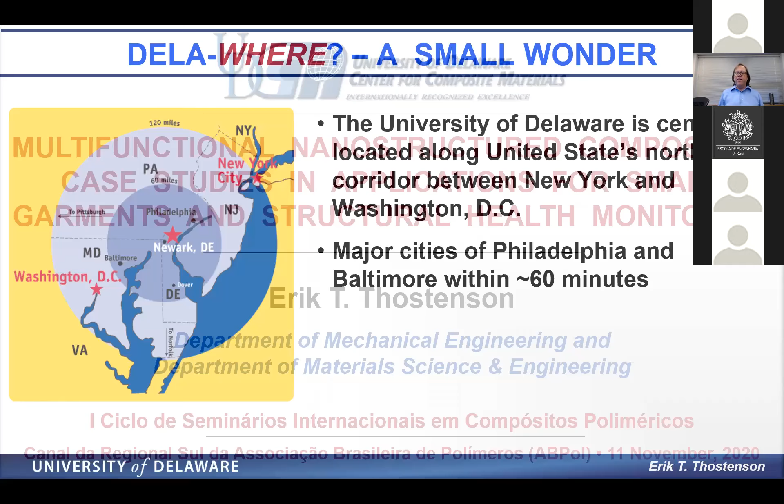But Delaware, very recently, is the home to the President-elect of the United States. He's a University of Delaware graduate and also a colleague. He has a faculty appointment at the university as part of the Biden Institute for Public Policy.

As Sandro mentioned, I'm affiliated with the Center for Composite Materials. It's the oldest research center here on campus and has really been an interdisciplinary center of excellence in composites education and research, spanning everything from fundamental research to transitioning technology to industry.

Also, mark the date - hopefully everyone will be able to travel by 2023. I am co-chair of the ICCM 24 conference, and that is being held in Baltimore, just about an hour down the road here from Newark.

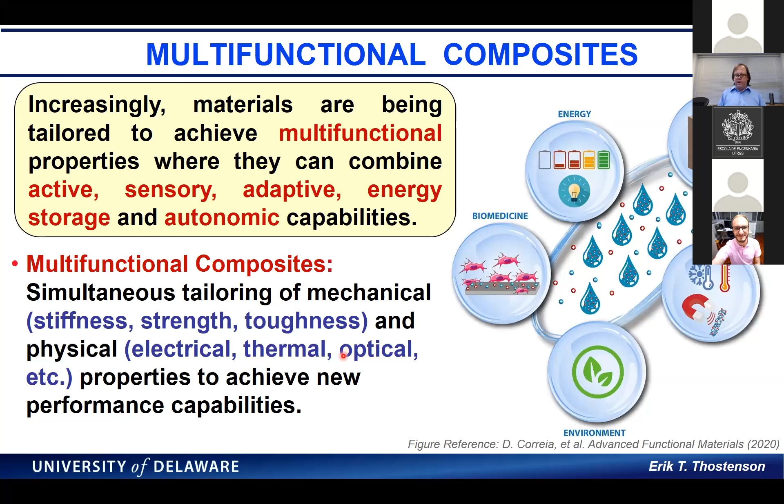So this multifunctionality, in addition to when we talk about traditional fiber composites where we're usually talking about strength and stiffness, now we can tailor this to integrate more functionality at the material level. These are just some examples of multifunctionality.

This is from the AFOSR Mechanics of Multifunctional Materials and Microsystems website, which I've adapted a little bit, but I've highlighted a couple of the key words that I think are really both current and emerging areas of integrating multifunctionality in materials - specifically sensing, autonomic and reconfigurable systems, self-healing, self-cooling, energy management and generation, as well as actuation.

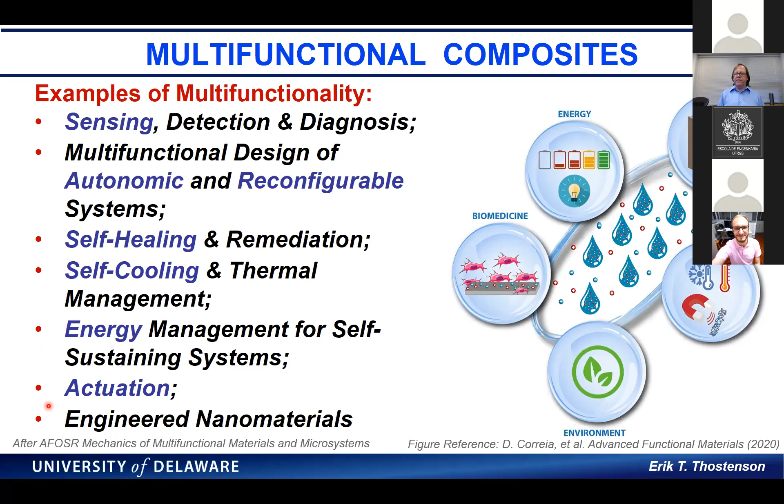I think a lot of people, many here, will likely be familiar with nanostructured carbon - the two most common things we talk about are carbon nanotubes and graphene. They have remarkable physical and mechanical properties, and also very high aspect ratio, whether it's length per diameter or the length per thickness of the graphene sheet. This has really stimulated, from a composites point of view, a lot of interest in the development of these composites.

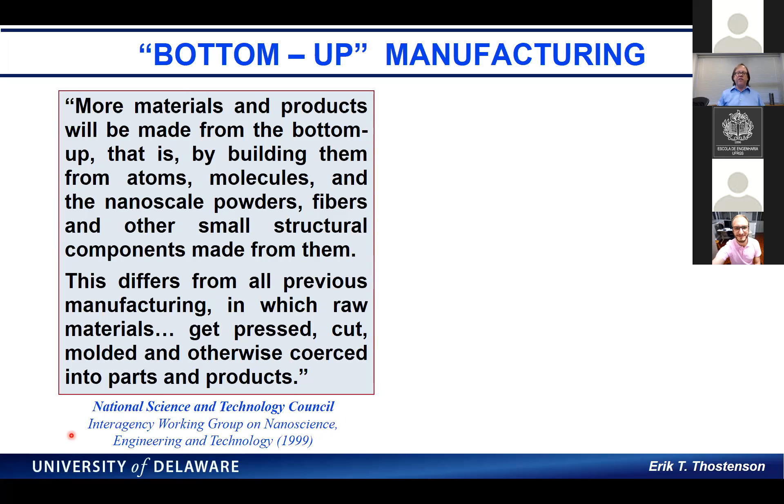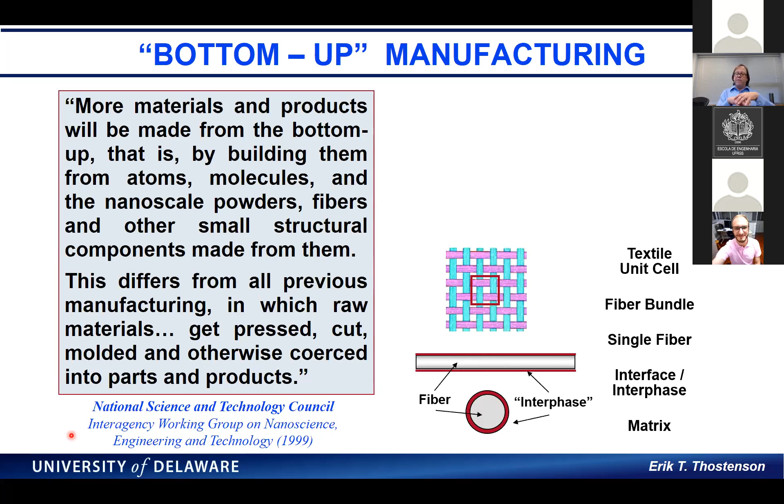But from my point of view, this wasn't something new. As a composite materials engineer by training, I knew that you select the materials, you tailor the interface, which is certainly at the nanoscale. You bend and twist the fibers together, you laminate them, all the way up to the final net shape composite. So really, composites are bottom-up manufacturing, and the integration of nanotubes is just one scale a little bit further down - nanotubes or other types of nanoparticles or nanosheets.

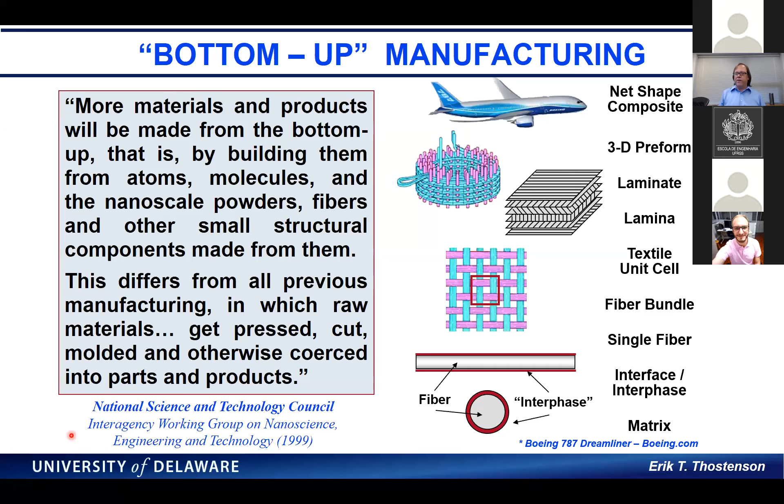I think the reason for this is you can think of all these discontinuous nanomaterials as tiny little wires. When you strain them, the tunneling gap changes between those individual wires. And then at some point I thought, well, obviously when you start getting cracks in the material, you start severing some of those permanent connections.

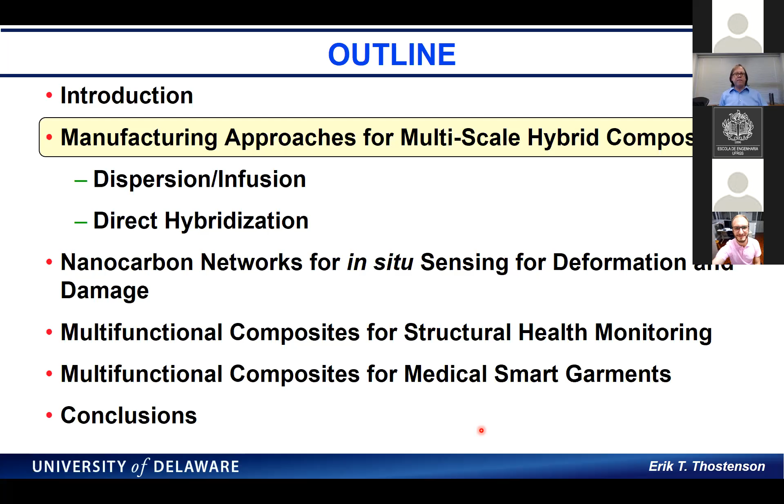These are just some different approaches. I mentioned this dispersion into the resin. People have spent a lot of effort over the years looking at this, as well as myself, modifying the chemical functionality, looking at different ways to disperse it, such as a calendaring approach, and then manufacturing the final composite using something like RTM, VARTM, or maybe resin film infusion.

The other approach is direct hybridization with fibers, basically integrating the nanomaterials together with the fibers, followed by infusion. There are a couple different ways we've done this in my group, and other ways other people have developed, but I think the three most common are chemical vapor deposition, dip coating and sizing, and something we've spent a lot of time on in my group over the past several years, electrophoretic deposition.

In this dispersion and infusion approach, we disperse the nanotubes using some sort of shear mixing. In our work, we use a calendaring approach, and then infuse the dispersion into the fiber. This was many years ago, using vacuum-assisted RTM, or VARTM as many people call it. You can see the dark area is that dispersion of nanotubes in the epoxy resin. One thing we could see is once we manufactured the composites, we still had electrical percolation in the as-processed nanotube fiber composites, and because we had a very good dispersion, we didn't see any filtration.

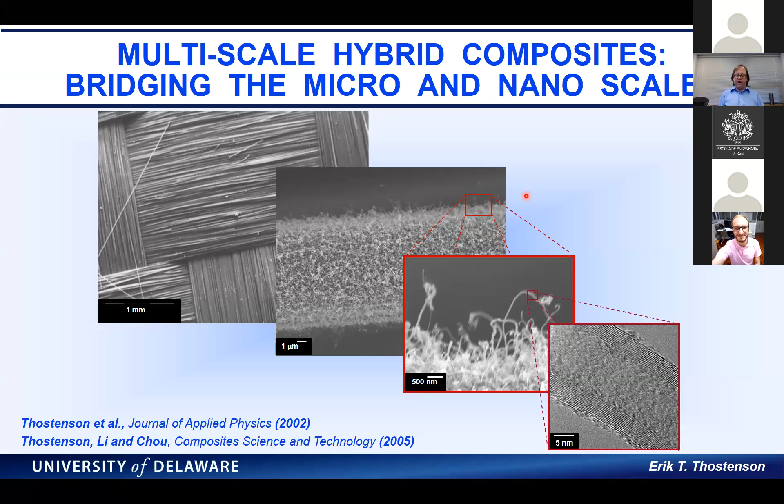The other approach is direct hybridization, and the first one I talked about was CVD, which is something I spent a lot of time doing in my PhD work. That's what you see, the nanotubes grown on the surface of the carbon fiber. Basically what we do is apply the catalyst, heat treat the fibers, and then put them in a CVD reactor, and grow them under some sort of hydrocarbon gas. In this case, we used acetylene.

The catalyst is applied directly to the surface, and it takes about half an hour to grow. This is a high temperature process, so it can be damaging to the carbon fibers, and it's also not applicable to a lot of other types of fibers such as aramid or glass fibers, which may soften, or you're certainly going to burn off the sizing, which is a chemical coating on the surface of the fiber.

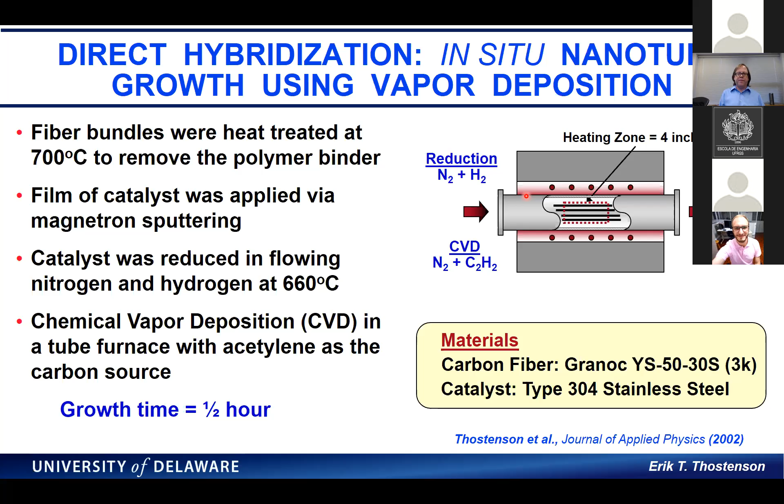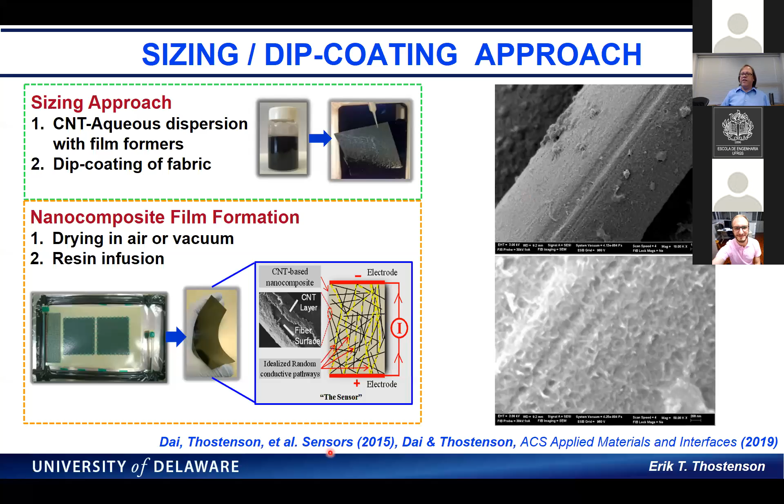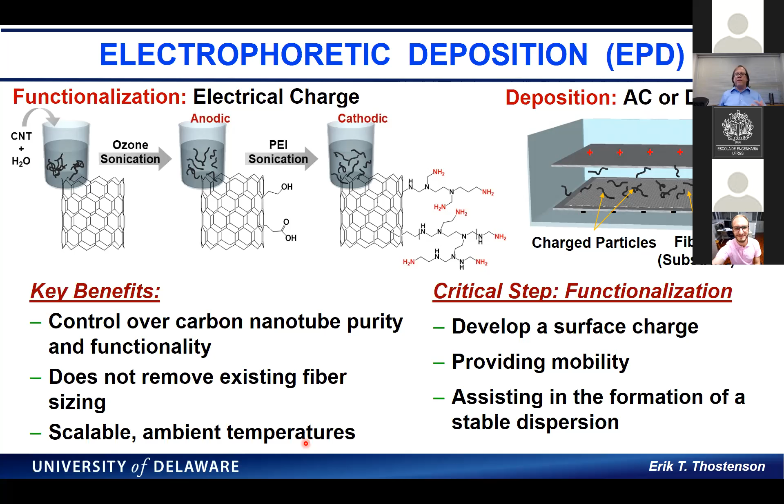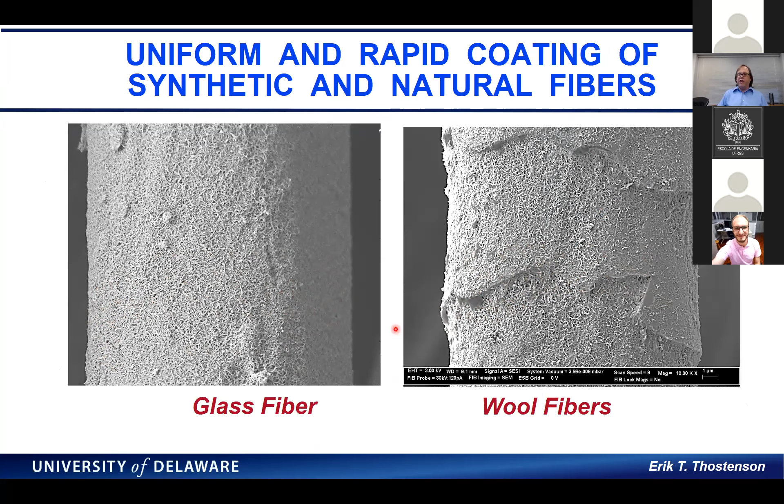These are some examples of where we've deposited on different fibers, and it doesn't just deposit on the fiber, but it completely surrounds each fiber in the bundle. This is glass fiber, where you see a very uniform coating. We can also deposit on organic materials such as wool, or aramid fibers, which would certainly disintegrate in a high temperature reactor. We also have a lot of control over the thickness - these are a couple of cross-sectional micrographs where we've deposited at varying thicknesses.

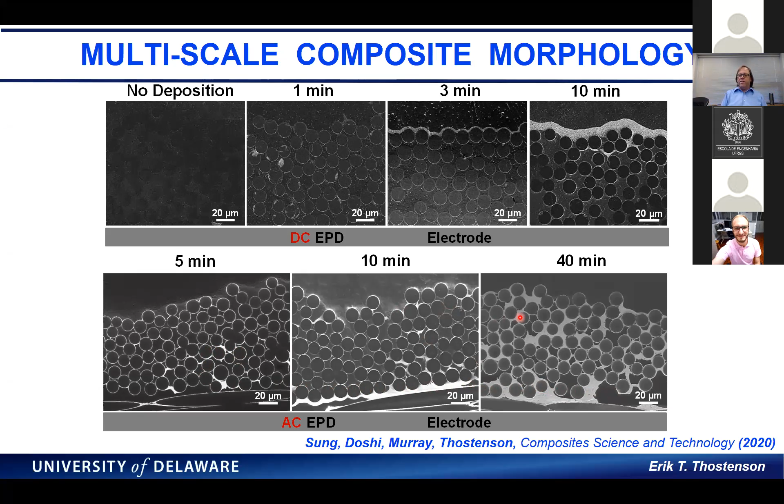So I think it's really not just raining down onto the fibers themselves, but actually this film grows over the fibers and around each fiber and is remarkably uniform. So that's really this enabling technology.

And in these next ones, we use all the different techniques because they all can create conducting pathways. Sometimes different processes are better than others.

But I just want to briefly mention and talk about the nanocarbon networks for in situ sensing of deformation and damage. This is really where we got into many years ago. It was really just me in the lab playing around, saying, well, what if we make a fiber composite with these? Maybe we can use it to sense microcracks.

In my composites class, this is a classical mechanics problem: you generate transverse microcracks in cross-ply laminates, and as you continue to strain at higher and higher levels, you start getting a saturation of cracks due to shear lag. Of course, this matrix cracking doesn't necessarily change the Young's modulus that much, but it's certainly detrimental to durability.

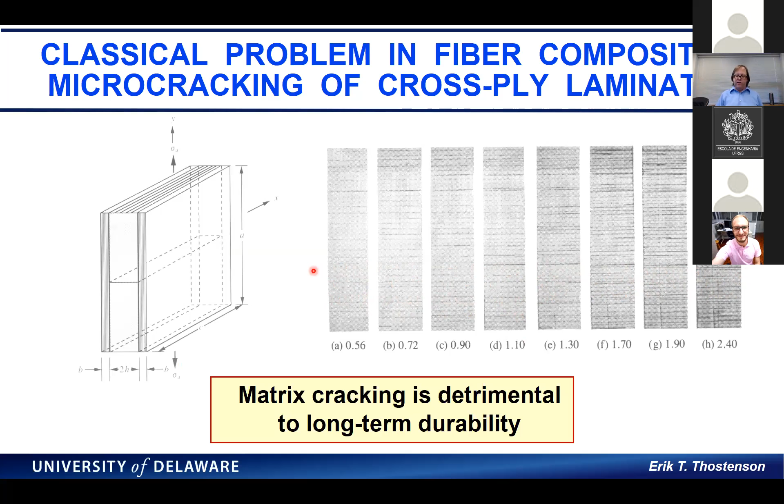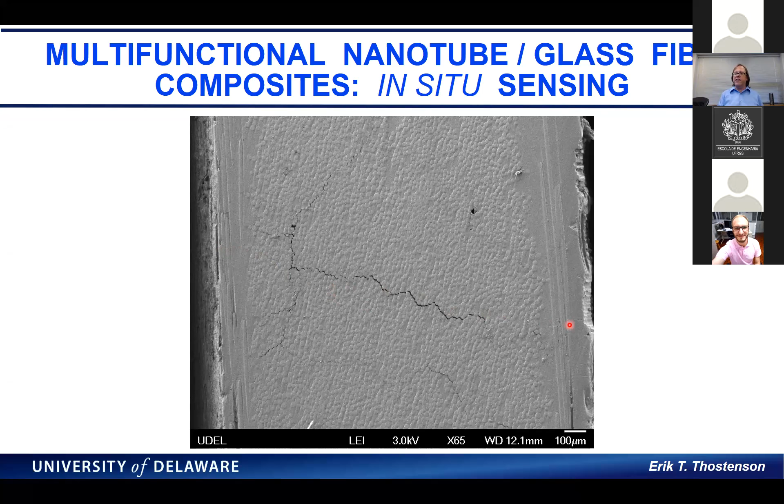If we zoom in a little bit, you can see the individual fibers, and you can see it's debonded at the interface and cracked between the individual fibers. Now if we look in between the two fibers, right at that edge, we can see the nanoparticles, in this case the nanotubes, sticking out. So we're creating those conducting pathways, and the cracks are breaking them.

So this was pretty exciting that we could see this, but could we use this to detect damage? We did these very initial experiments where we looked at delamination, where we cut a center ply, and we could very clearly see the initiation and extension of delamination when loading this specimen in tension.

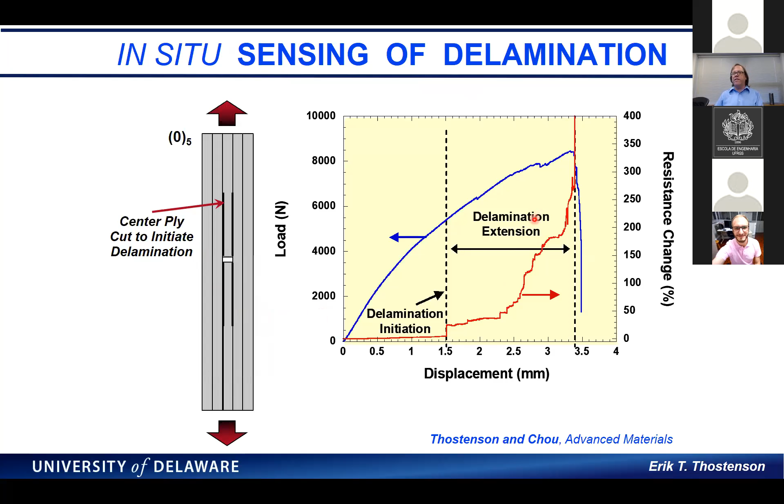And then we made a cross-ply laminate, and this was also very clear. At some point you saw these jumps, and this was really that damage accumulation where you start getting transverse cracks, and then those transverse cracks start accumulating in the 90-degree ply, and then eventually lead to either interfacial delamination or fiber fracture, and then specimen fracture.

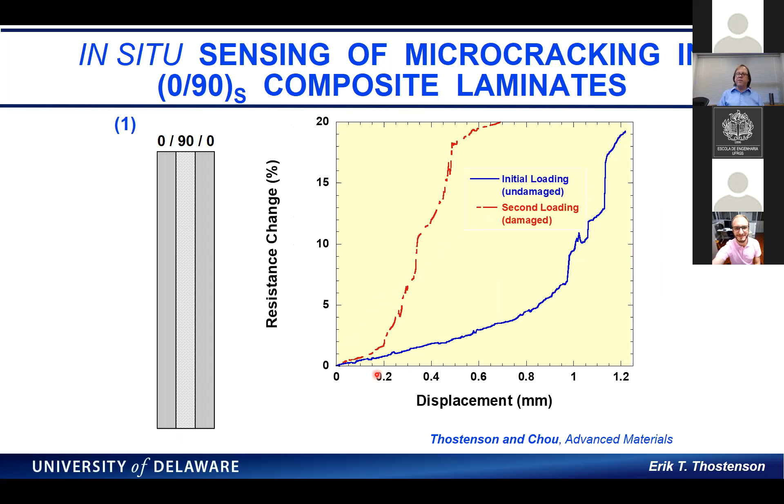So this was encouraging. We did some more work where we loaded it in tension and those cracks would open. As we unloaded it - that's the blue curve, the initial loading - those cracks would close on themselves. But when we reloaded it, those cracks would reopen, at a much, much lower displacement.

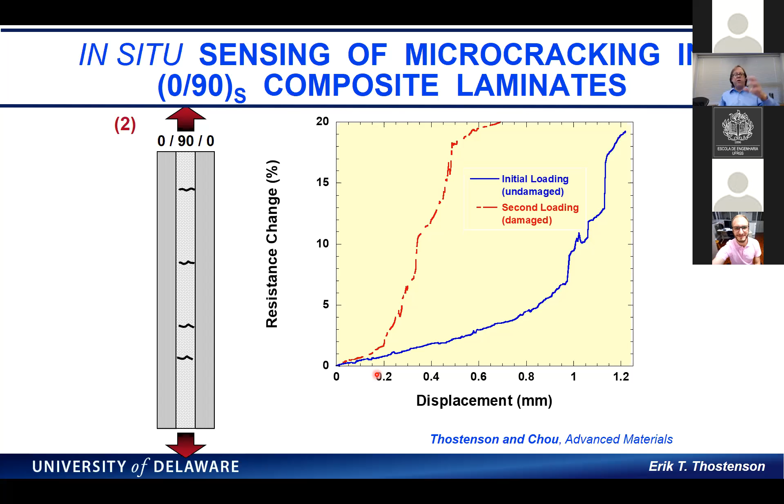So the specimen was actually telling us, due to the piezo-resistive behavior and the opening and closing of cracks, something about the state of damage.

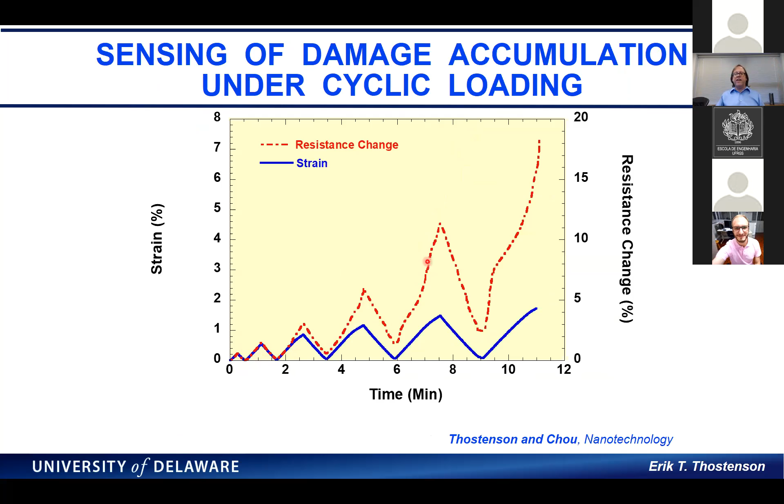This shows the same thing. Here we did progressive increasing cyclic loading, and at very low strain you really don't see much - it's like a strain gauge - but at higher strains you start seeing that deviation, and it becomes quite nonlinear. So we see the crack reopening, then we see that elastic loading, and then we go higher and see new damage.

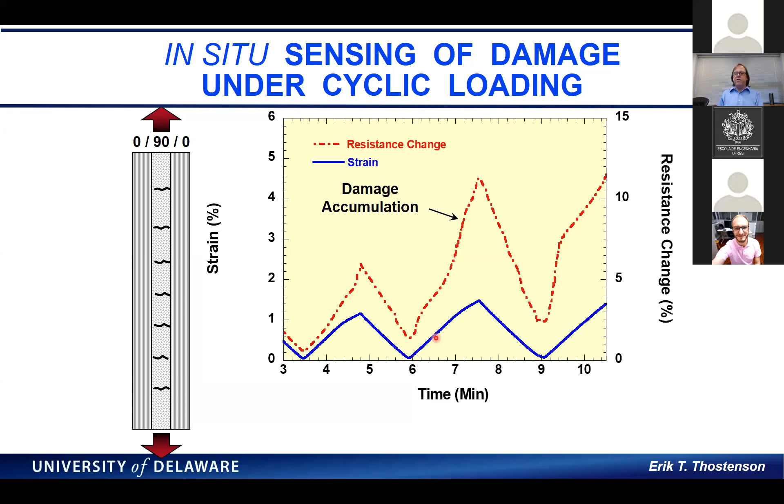This was exciting because we thought now we can use this to detect a lot of other types of damage, and do that in situ. This is that same data plotted in a different way, showing you the damage accumulation, the crack closure, and the crack reopening.

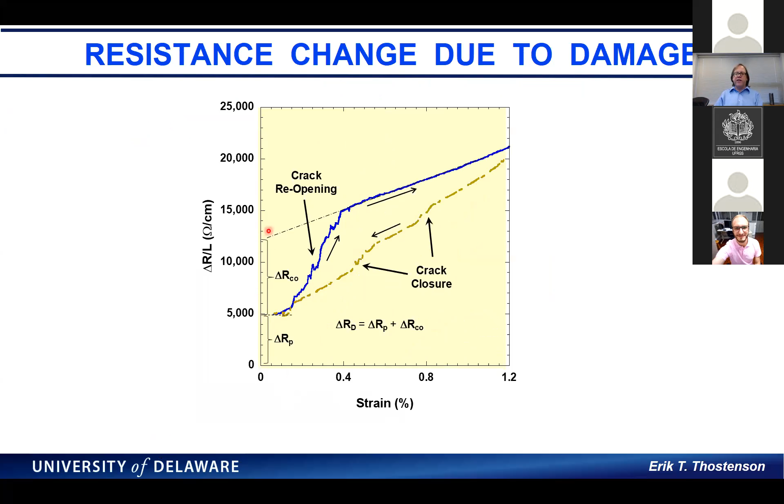We did some very careful measurements. We call this the damage resistance, because there's some permanent resistance change and also a change due to the crack reopening.

These are optical micrographs where we took edge replicas - we polished the side of the specimen and pulled it off so we could count the number of cracks. Very tedious work. This was done about 9 years ago.

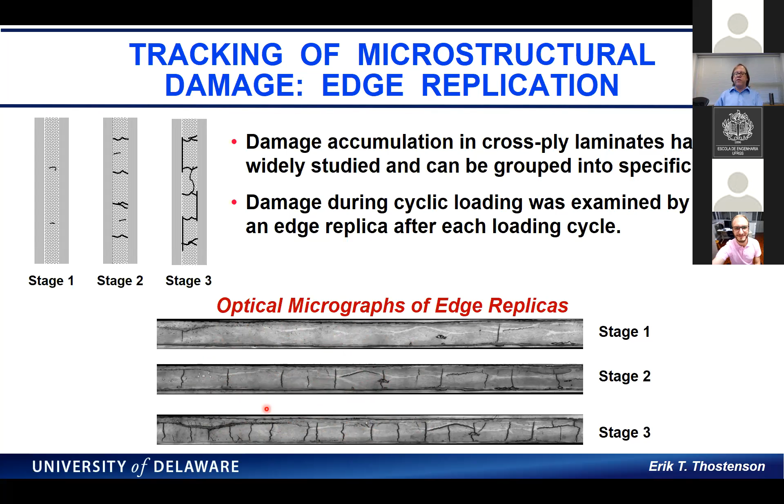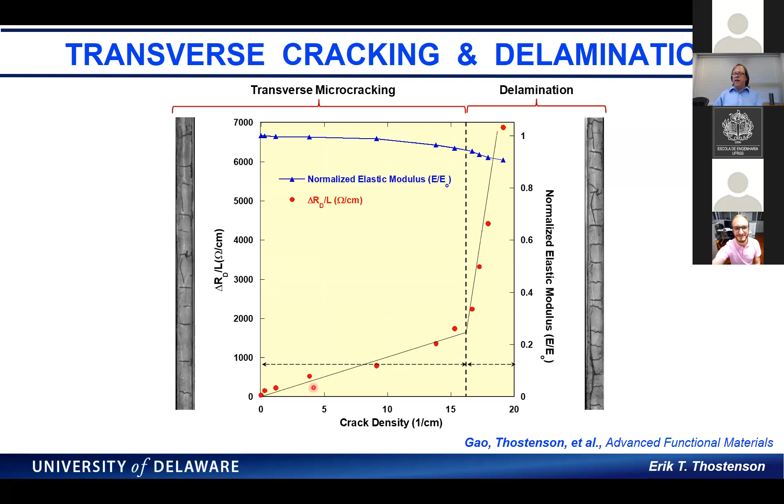I think the key here is that this line represents the linear accumulation of cracks, or the accumulation of transverse microcracking, and the significance is that it's linear - it's really ohms per crack.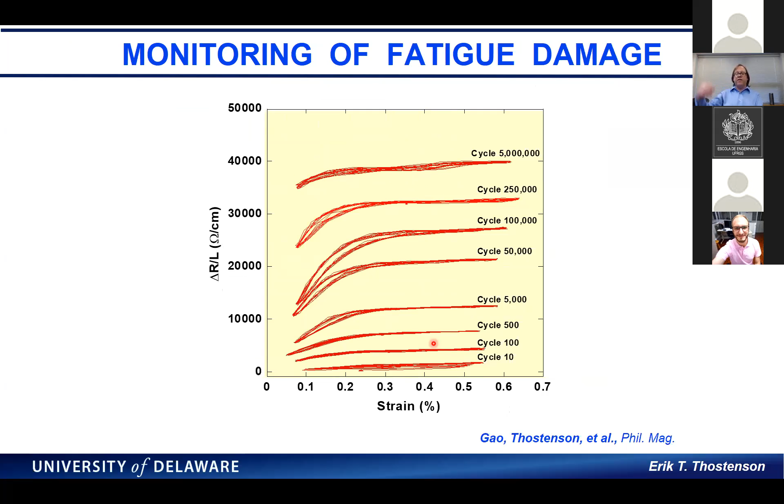We've also validated this with acoustic emission. So when we see acoustic activity, we also see that resistance change, so we know that we're picking up damage. We've done fatigue testing, and again you see that crack opening and closing, as well as the changes, over 5,000,000 fatigue cycles.

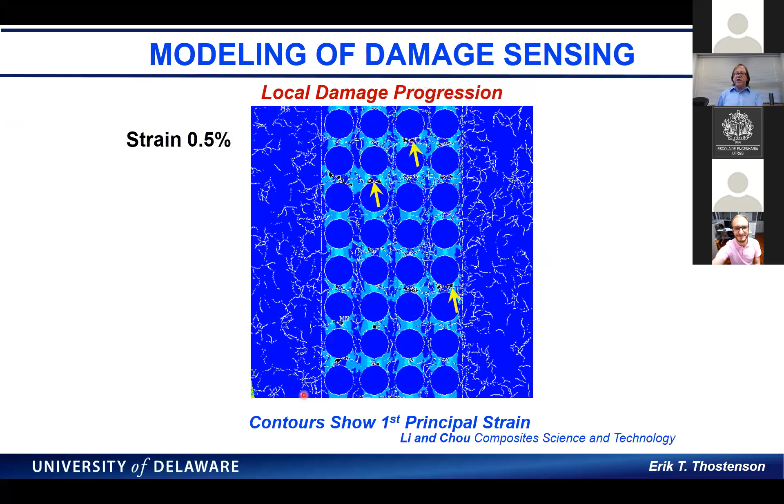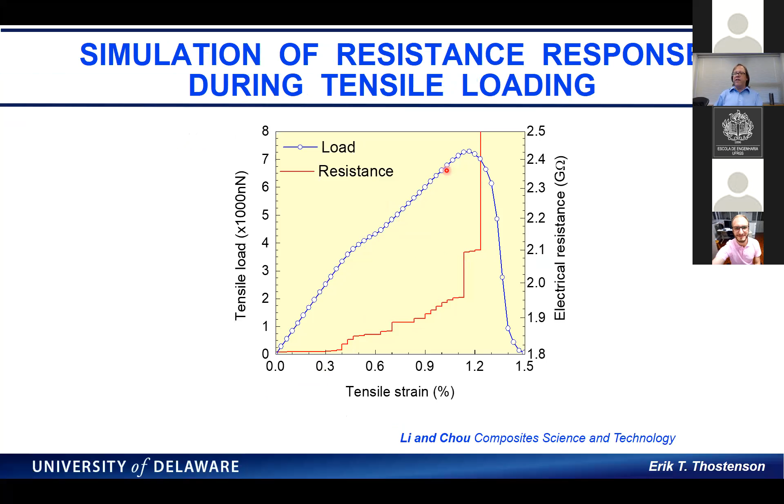A colleague of mine has also done some modeling work in this area. We're looking at creating a nanotube network in situ, creating a finite element mesh, and then looking at that damage initiation and the eventual coalescence into a transverse crack. The results quantitatively are not the same, but qualitatively match very well, particularly in the linear elastic part, up until you start getting cross-ply cracks and then those jumps.

So that was exciting. Now I want to spend the last half, maybe 20 minutes or so, talking about how we can utilize these composites for structural health monitoring. We can take this outside of the lab and not only know that there's damage, but know where that damage is. So the first thing I want to talk about is some of our work in localized and site-specific damage monitoring.

Specifically using a technique called electrical impedance tomography, or in our case, electrical resistance tomography. Then I'll highlight our very recent work in repair and structural health monitoring of infrastructure, both concrete as well as steel bridges.

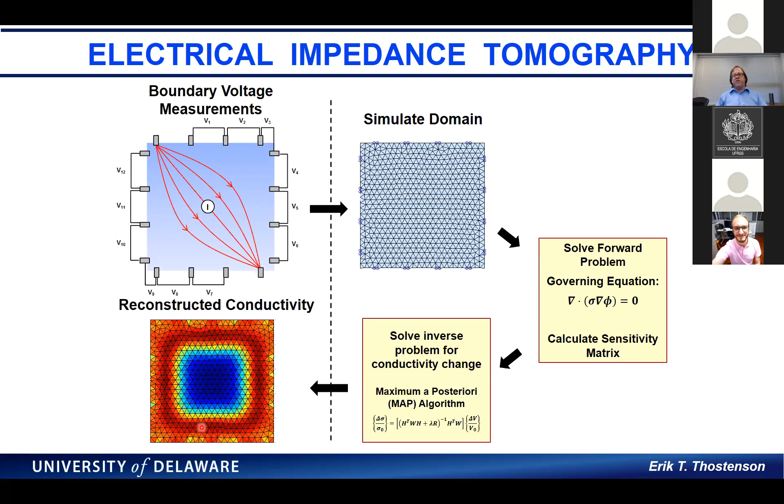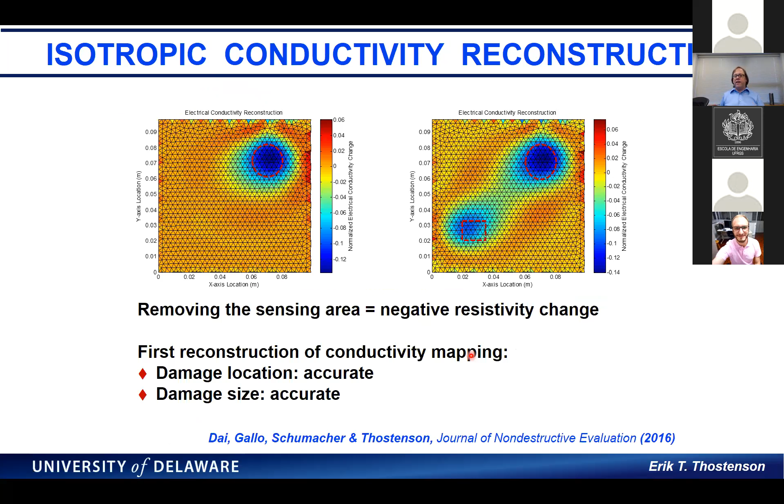So this was some of our initial experiments where we looked at - here's a panel that we manufactured, and then we just introduced different types of damage. Again, the reconstructions were quite accurate - the damage location and the damage size was quite accurate based on this carbon nanotube composite.

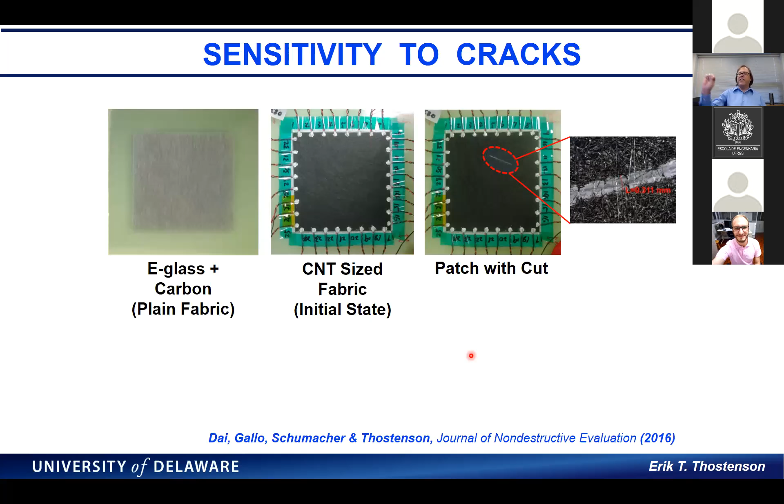This is another case where we looked at whether we could use it to detect cracks. So what we did is we basically cut a crack into the patch. Again, we could detect the damage location within reason, although the damage size was expanded, partly due to the slightly anisotropic nature of the composite.

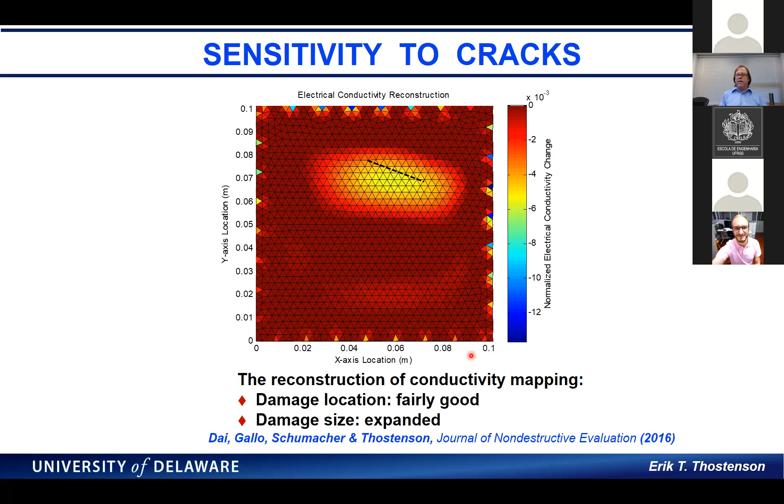So this is just another example. We wanted to say, well, can we really sense this barely visible impact damage? The example often used is if you have an aircraft wing and you drop a hammer on it - you can't see the damage, but is there damage there?

Okay, so now I'd like to talk about this recent project. Well, it's not so recent, it's been ongoing for over 5 years, where we do repair and structural health monitoring of infrastructure. I think one of the things we often talk about with nanomaterials is that we make small coupons and go into the lab and test them because it's difficult to make large scale structures.

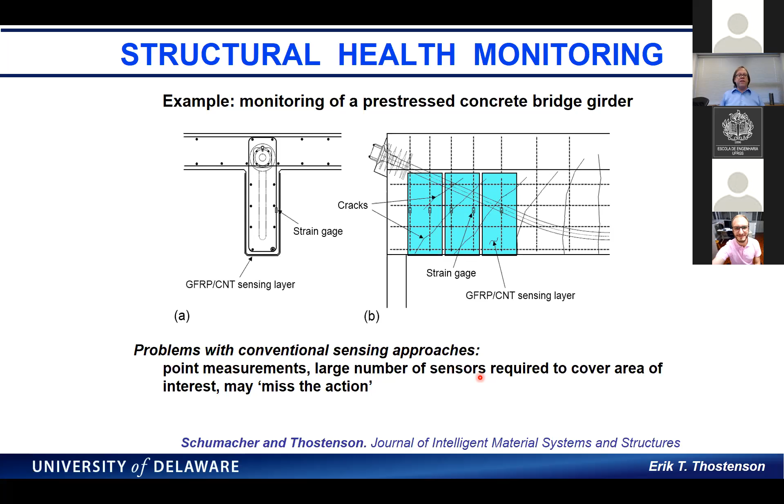In this case, we could really have a truly distributed sensor that would be able to detect those cracks. These conventional sensing approaches are really point or quasi-point measurements, and you need a large number of sensors. So we thought, well, this could be an opportunity because we've developed a manufacturing process where we could scale up, and we didn't just make small test specimens or small panels to cut test specimens from, but we could make this material that was meters long, by doing this direct deposition, either through dip coating or electrophoretic deposition.

So I won't talk too much about this, but this is one of the test specimens. The span is I believe over 3 meters, and the specimen itself is about 4 meters long. One thing you see on the left-hand side, these are U-wraps or shear wraps that have fiber reinforcement with them, intended to be a repair because this beam was pre-cracked and does not have enough shear reinforcement. So this was to repair, but also detect damage.

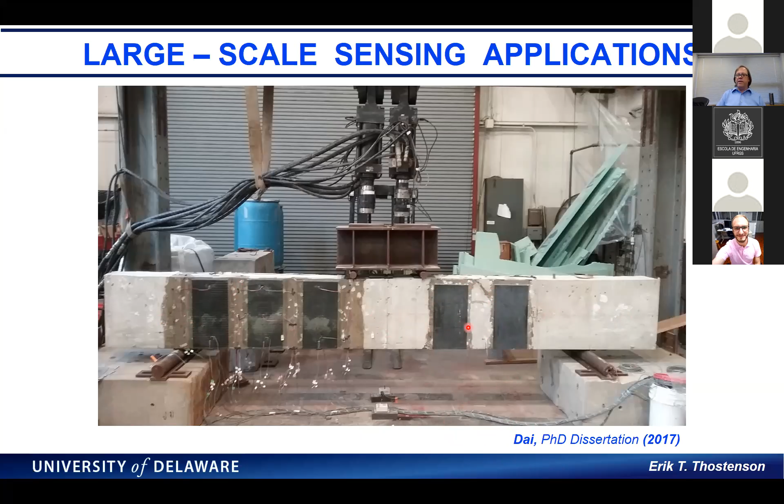And then over here, these are the sensor only. This is some work by my PhD student, Hongbo Dai. In addition to the shear beam, we also had a similar beam as what you see here. This is a specimen, actually a beam that's flipped upside down. So we're applying a composite to the tensile side, and at the interface between the composite and the beam is a non-woven sensor made of carbon nanotubes. These students are Sagar, Shafiq, and Hongbo.

In addition to the concrete work, what I'll spend most of the next few minutes talking about is we've been looking at steel cracks, fatigue cracks growing in steel. In the United States, it's a major problem that the average age of most bridges is, I believe, over 45 years, and a lot of these have fatigue cracks in them. In fact, early fatigue, in terms of design, really didn't develop until about the 1970s. So one of the ways to do repair materials or rehabilitate infrastructure would be to take that infrastructure and bond a composite to it.

And the feedback that we got is that it's great, but you're covering up the cracks so that the bridge engineers can't go out and look at the cracks anymore. So this is where we thought, well, now we have this unique multifunctional composite sensor, maybe we can utilize this to detect that growth of cracks underneath the composite repair.

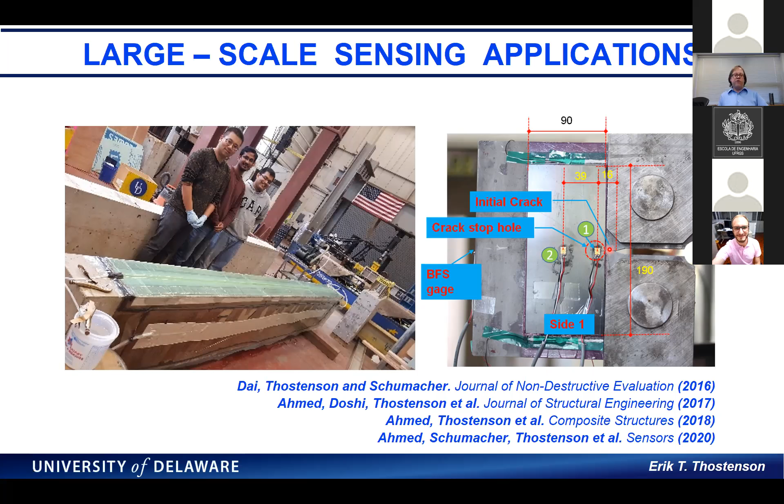So a little bit of background: there's a lot of fatigue sensitive details. That's one of the major reasons for the deterioration of a lot of our infrastructure in the United States, specifically steel bridges. This is actually a fatigue crack in a girder that we went out and did monitoring on. We did traditional monitoring.

What you see here, these dark areas, is where they drilled what we call a crack stop hole. That blunts the crack's tip, and also drills away some of the strain hardened steel at the tip of the crack.

These fracture critical bridges are a major challenge, and there's a lot of interest in that. This is actually intended to be a repair technique, but it's not always very effective. Here you can see they drilled a hole, and then that crack reinitiated. So then, a couple of years later, they drilled a bigger hole.

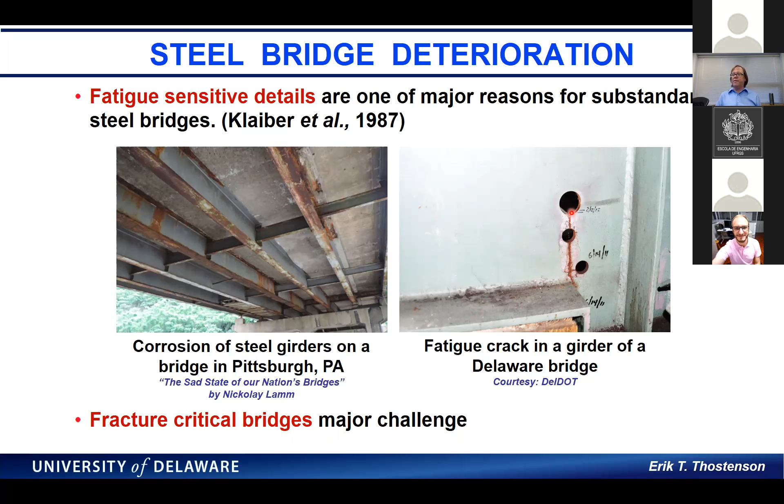So our idea was that we could take our nerve-like sensors. This top picture is a sensor that has carbon nanotubes deposited onto the fibers. You can see the fibers are dark, that is the carbon nanotube coating. This is bonded onto a steel substrate that has a fatigue crack in it.

As you can see, as that crack has grown, the sensor also fragments because we've designed the sensor to fragment. What that does is, as we're measuring the electrical properties and that fatigue crack grows, just like on a different scale where we're looking at microcracking in the composite, here we're looking at cracking in the steel plate. We're severing those conducting pathways.

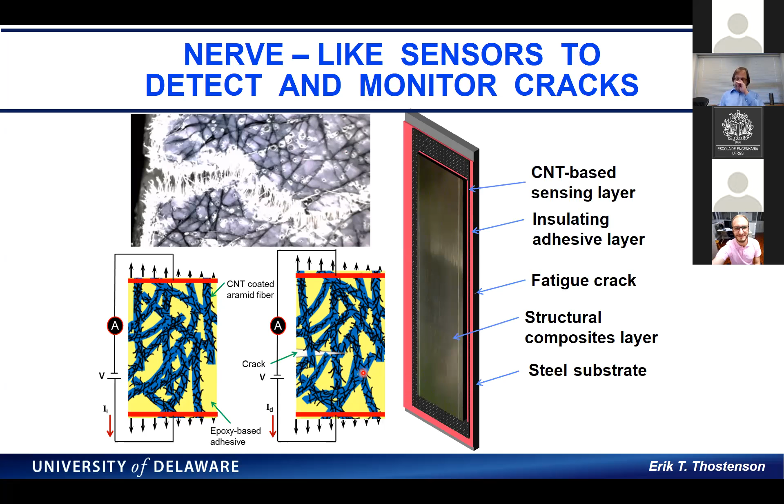And then I think there's an animation here. So what we do is we apply a very thin insulating layer, and then we apply our nanotube sensing layer, and then we apply a structural composite layer to also be a repair. We can use it with or without the structural composite. And then we apply our electrodes for sensing.

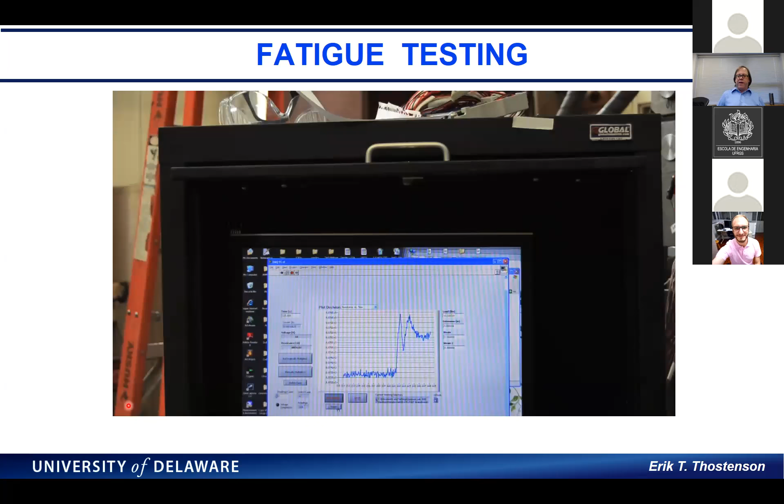This is actually a patch, and here we're doing impedance tomography, but we're not actually measuring... let me go back here. You can see on the right-hand side there's a lot of electrodes, but we're not using all those electrodes in this measurement.

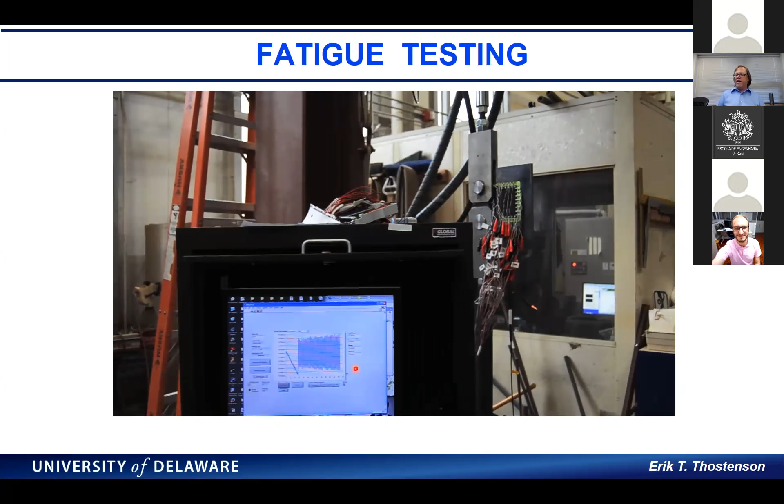But you can see on the computer screen that as we start loading the specimen, that electrical response is in real time with the specimen. So again, you see the specimen in the background is a compact tension specimen, and then you see that initial loading, and then we can measure that cyclic loading.

So the first step was to validate this in the laboratory. Is it going to work? So we generated several different test specimens. These are compact tension specimens. In fact, I have one here in my office, and they're really not that compact. But this is one of the fatigue specimens. This is where there's no composite repair, so that would be like in the left-hand corner.

The other one is where they're drilling crack stop holes in the field, we also drilled a crack stop hole. The other cases are where we applied a structural composite, and also where we applied a structural composite and also drilled a crack stop hole.

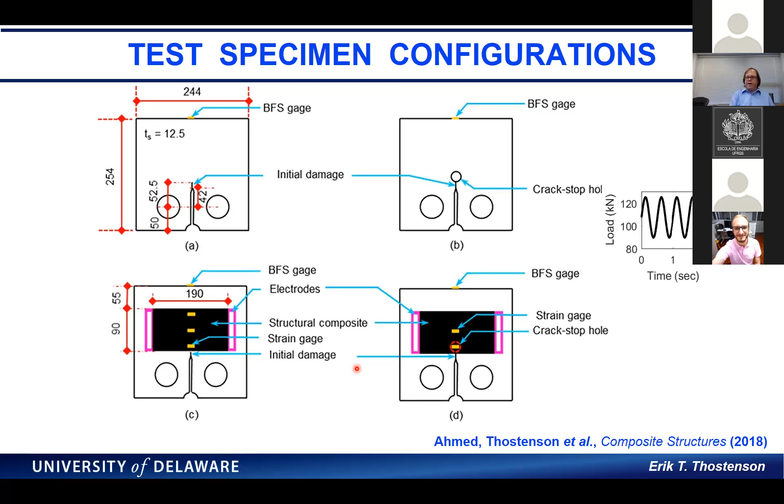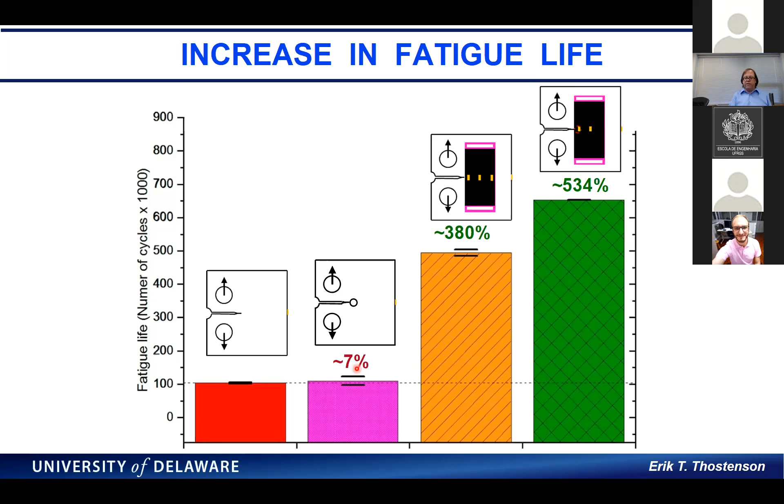There were some practical implications that made this difficult to do because of the crack stop hole — we would have adhesive rolling into the crack stop hole.

Okay, so these are the specimen configurations. On the left-hand side, this is figure A, right? So that is just our compact test specimen. You can see the fatigue crack right at where we machined the notch, and then we're just monitoring that until it fails.

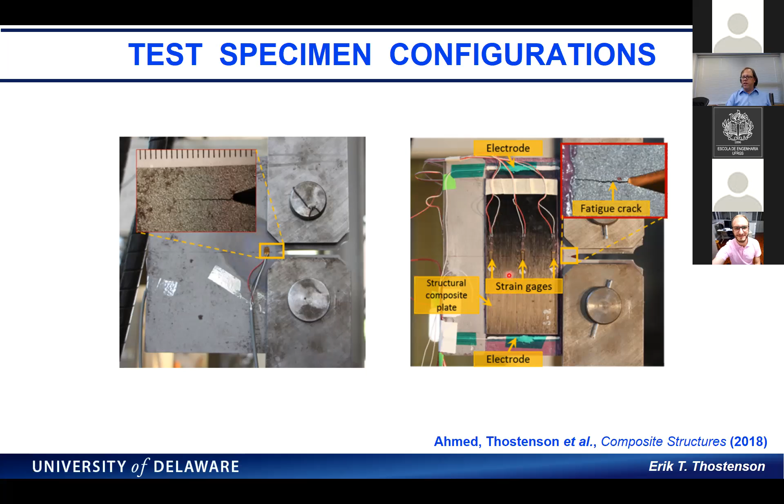So here we've applied our composite repair and also integrated our sensor at the interface. So we monitor the crack growth behavior.

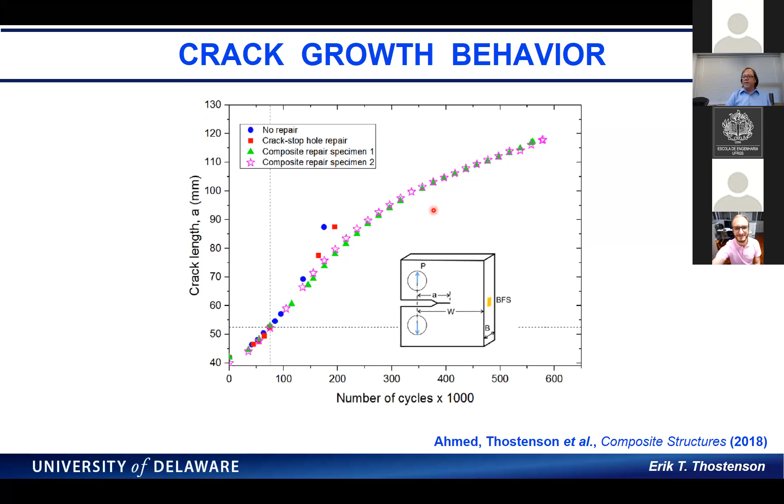One of the things we do is we can measure the back face strain, and the back face strain tells us something about the crack length. So here you can see there are two cases where there's no repair and crack stop repair — they fail at about the same crack length. But here, where we apply the composite repair, we can drive that crack much longer than the critical crack length because we're taking stress off of the crack tip. One of the unique things, so I'm a material scientist.

My PhD is in material science, so I like to look at fracture surfaces. We looked and could see the beach mark. So what we're doing is measuring that, and using it we can validate the back face strain with our physical measurement of the marks on the surface of the specimen.

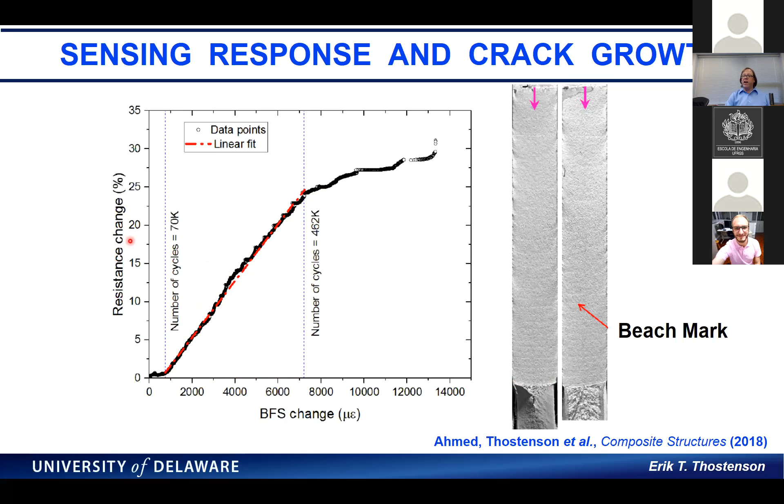Here you see the resistance change of the specimen due to the nanotubes, and then the back face strain change, which measures our crack length, against the number of cycles. You see it's very linear. Then once we hit 462,000 cycles, we actually started fatiguing the back face strain gauge, so it didn't give us good data after that. But I think it's interesting that we were not fatiguing the resistance change.

These just show that we're able to detect this with the number of cycles, and it was quite repeatable. These are a couple of different specimens for the composite repair.

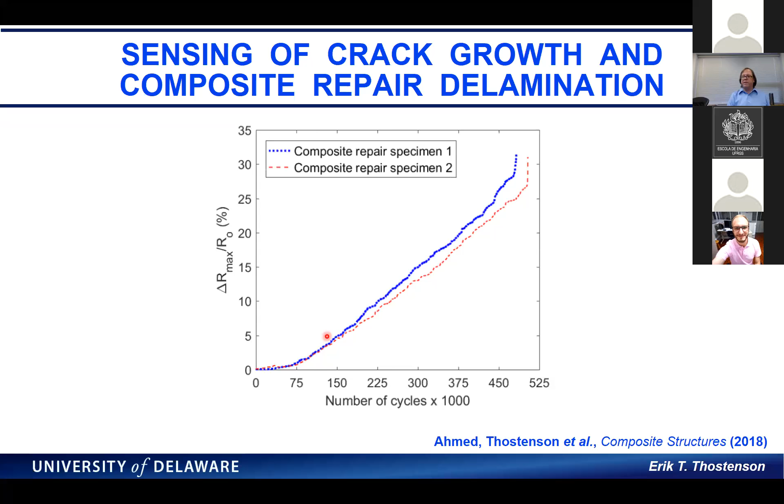But what's more exciting is, once we validated it in the lab, we put it on a bridge in Wilmington, Delaware, very close to the train station downtown. On the left-hand side you see the river that goes through downtown Wilmington. The train station is right here, and this is the main downtown area. You can see this bridge is actually a drawbridge because it's over the river.

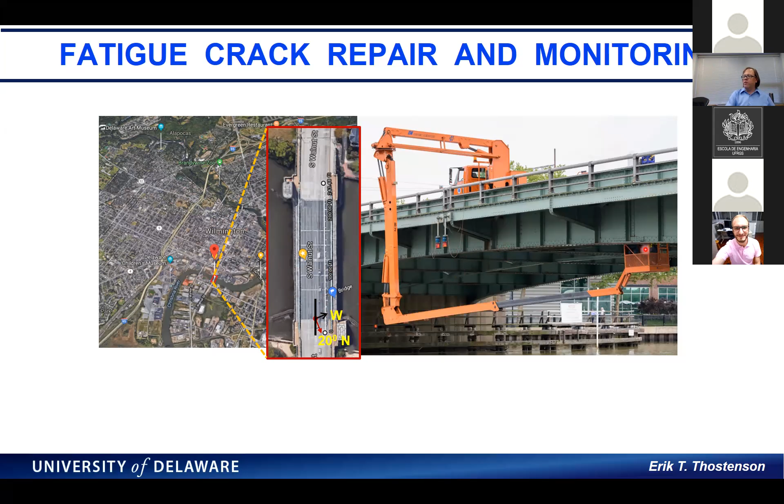It's fairly low, and we actually got chased off the first day we went out. There was a very tall ship, and they came by and chased us off the bridge. But this is us going to install the sensor and the repair.

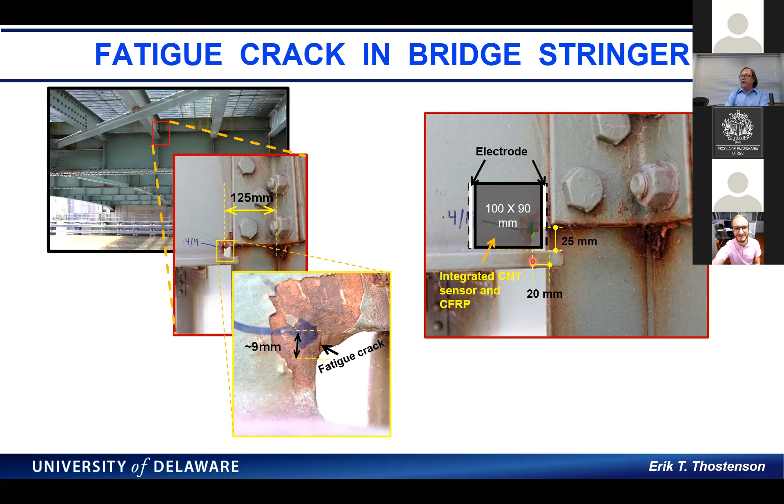This is the crack. You can see some corrosion, but you can also see the fatigue crack that initiated, and this was actually initiated at a previous repair. So we designed an integrated sensor, and we have two sensors on this bridge. We're also measuring temperature and humidity.

This is all sent to us over the cellular network, and it's self-powered by a solar panel. On the right-hand side, you see a video taken on my PhD student's phone showing the first few days that we had that sensor on the bridge.

We've generated a lot of data, and we're currently digging through that. But this is our little data acquisition system that we built that has a 4G LTE sensor, or radio, in it.

Okay, so the last part I want to talk about, for maybe the next 10 minutes, is this new area over the past probably 2 or 3 years that we've been working on: multifunctional composites for smart garments. The coating applied to the individual fibers you saw earlier isn't just nanotubes or nanoparticles sitting on the surface - they're chemically bonded to the surface and chemically bonded to each other, creating almost a sponge-like porous nanocomposite film.

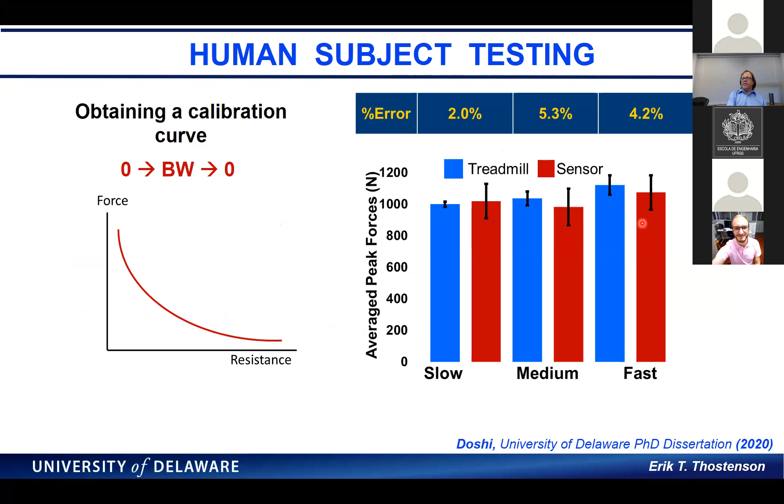But we also in the manufacturing lab drove over it with a forklift, and there was no damage to the specimen or the sensor. So it's quite a remarkable dynamic sensing range. We've also done human subject testing and also calibrated the sensors in order to validate them.

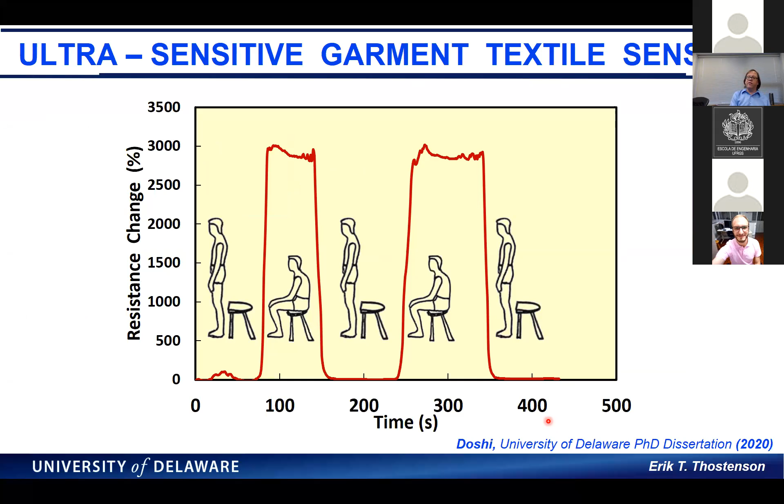This is just another example, instead of an elbow sleeve, this is a knee sleeve where somebody is standing and sitting. And you also see that very large change in the resistance at about 90 degrees, about 3,000% change in the resistance. This is another thing where I think it just shows the sensitivity of the sensor.

So it's fairly large. Also, we've made finger sleeves out of this as well, with the idea of making a smart glove that is pretty seamless.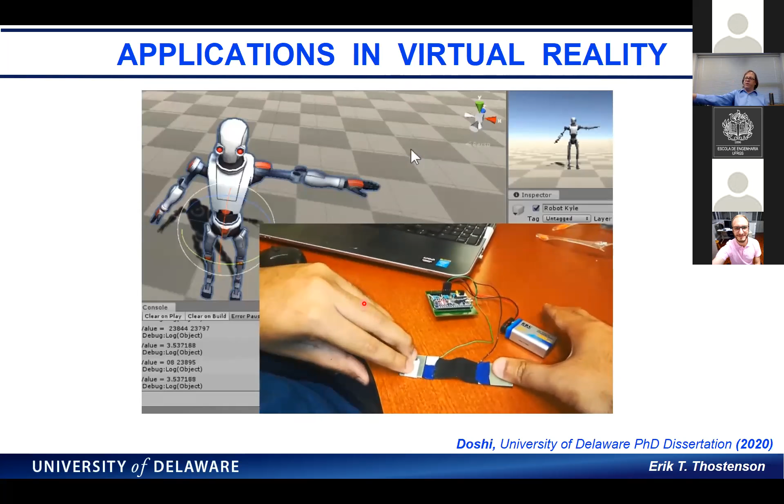We played around with a little bit of virtual reality. It's a little bit crude at this point, but what you can see is when we stretch the sensor, you can also see that motion of the arm.

So I guess with that, I'll just make a quick summary and conclusions. I think we've developed these manufacturing techniques to add this new functionality. And here I talked today about just resistive or piezo-resistive type sensing, but there's a lot of opportunity where we integrate different materials that impart different functionality.

And I think this is just kind of a case study. So we've used it for composites, and we've used it to detect damage. That could be, we've done fatigue testing, so it could be used for life prediction.

We use these pressure sensors. They show remarkable dynamic sensing range. That's something that we didn't expect, that it would be so remarkable and durable.

And then the sensors, we've utilized them, as you saw, for human motion, and then also for structural health monitoring. And we've actually, like I said, I showed where we put it on a bridge here in Wilmington, Delaware, but we also have a sensor on a bridge in Portland, Oregon.

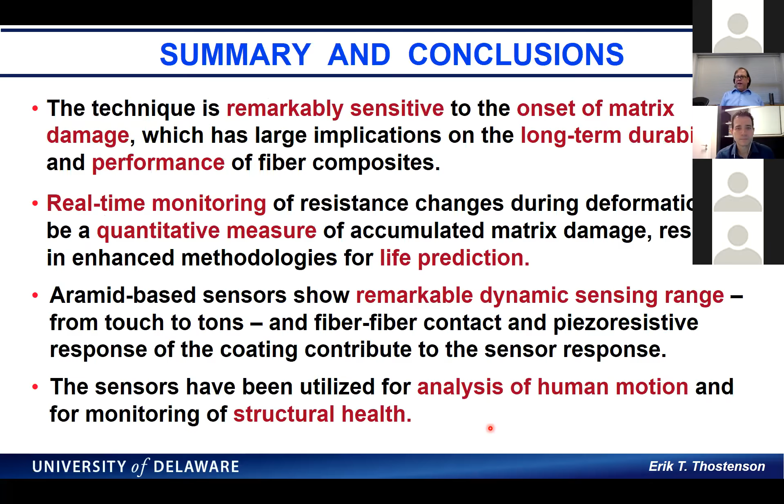Sure, and if we go back, I started working, it was actually almost exactly 20 years ago, November 2000 was the first time I ever grew nanotubes. But if we go back, I think at the very beginning, what made people enthusiastic about carbon nanotubes was their extremely high Young's modulus, as well as their high predicted strengths. The Young's modulus estimated, or sometimes measured even at the beginning, people were measuring above a terapascal, or 1,000 gigapascal. And I think that combined with the high aspect ratio, this was sort of the motivation, that you have this small diameter reinforcement that's very high stiffness and strength.

I think also, if you look at an Ashby chart of carbon fibers, and in fact in one of my papers I created one of these charts, for carbon fibers there's always a trade-off between Young's modulus and strength. So the higher strength fibers such as IM7 or AS4 have typically intermediate moduli. And the high modulus pitch fibers, you can get pitch fibers that are pretty close to a terapascal, certainly over 900 gigapascal, but they have much lower strength. So there's always this competition between Young's modulus and strength. I think what excited people is that carbon nanotubes had both, that you could achieve something with a high Young's modulus and a high strength.

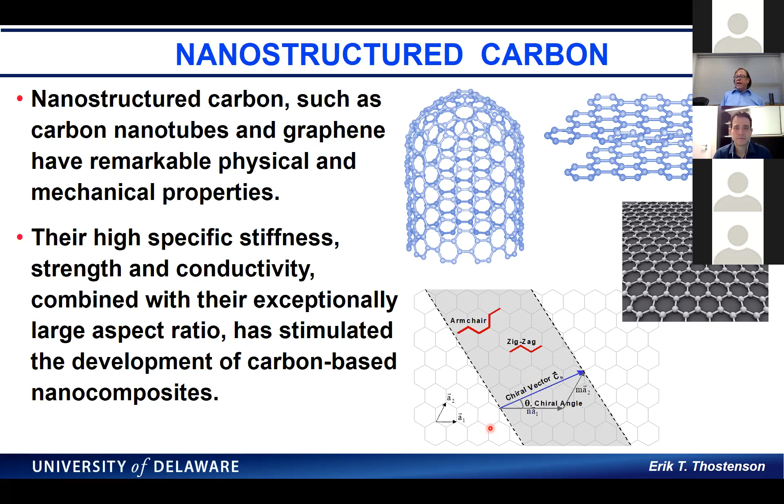So I think the initial motivation was strength and stiffness. In my PhD work, I mostly looked at mechanical properties, and this was one of the first things I did as a PhD student. It was actually more of a case study looking at where we could put the nanotubes to modify the shear strength at the fiber matrix interface.

I think also, just like every carbon fiber, not every carbon nanotube is made the same. There are defects, and if you have multiple walls, there are issues of load transfer. So they have an effectively lower Young's modulus and lower strength, particularly in multi-wall tubes, because regardless of whether it's rebar, carbon fiber, or carbon nanotubes, you have to transfer that shear at the interface.

But what really grew out of that is that I did a lot of work in this area, and then we were looking at electrical properties, thermal properties, and I think it's really the multifunctionality aspect. We've utilized electrophoretic deposition and seen nice increases in interfacial strength and fracture toughness when we combine them with fibers. But we can also modify the electrical properties, and that's where this aspect of multifunctionality has really come through.

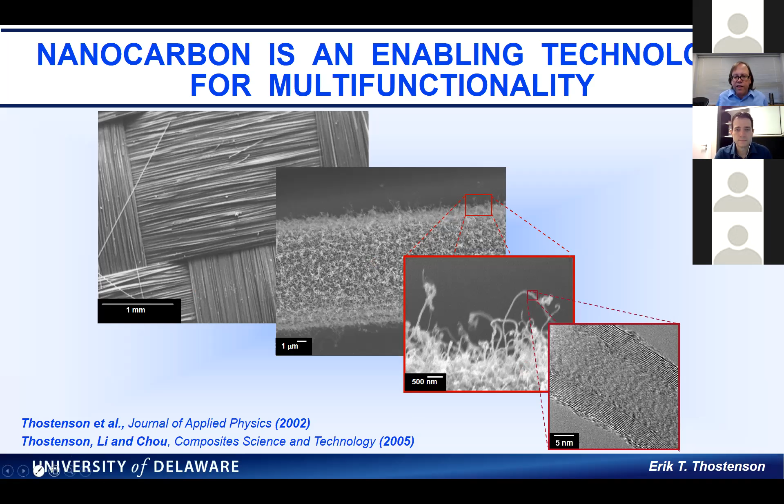Let me see if I can show this. If we come down to here, the amount of mass you're putting on an individual fiber is almost trivial because it's a very thin film, typically around 200 nanometers, maybe a bit bigger. We can control the thickness, but it's usually a couple hundred nanometers, and it's porous and open, not even a dense amount of tubes. So when we deposit onto a specimen, the mass change is really just a fraction of a milligram—we're using a small amount.

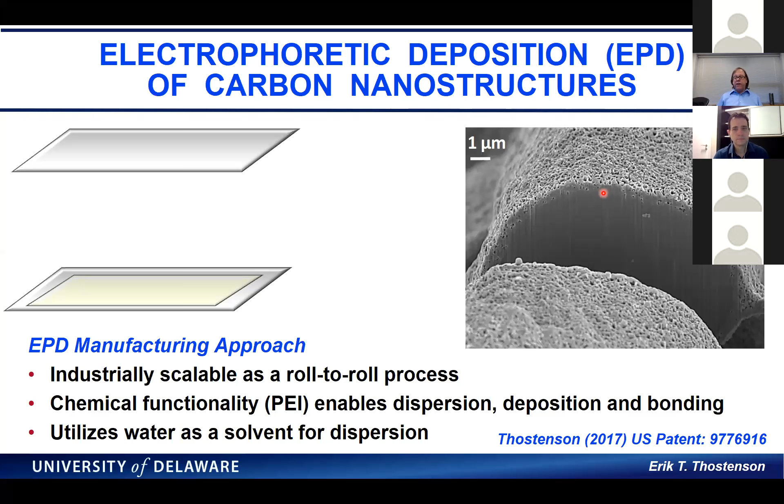Going back, if we look at this work where we're doing in situ sensing, for most of these we chose 0.5 weight percent.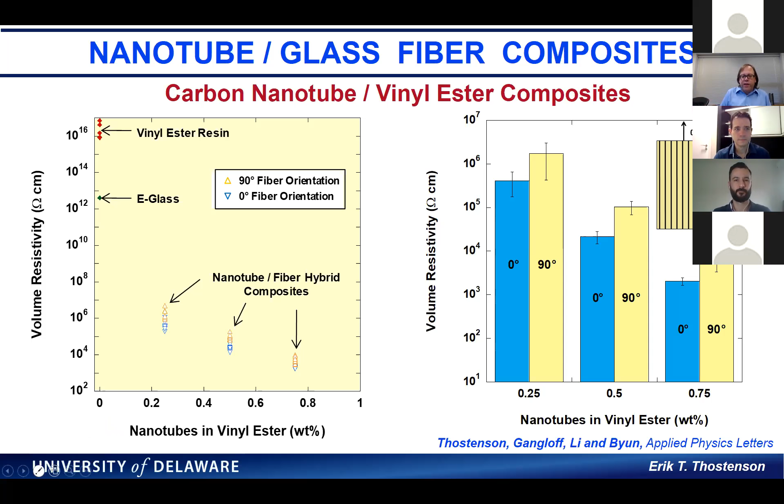We have also used, and I have a few papers we published a couple of years ago, where what we were doing... I think I have that video here, yeah, so this was one. These are patterned into prepreg, but they're interleaved into the prepreg, so they're continuous sheets, or we can do it different ways.

We can print, we can take a macroscopic sheet and deposit it, or we can put it on a carrier fabric and put it in between. We've done fatigue testing and a lot of other testing, and this is just like this.

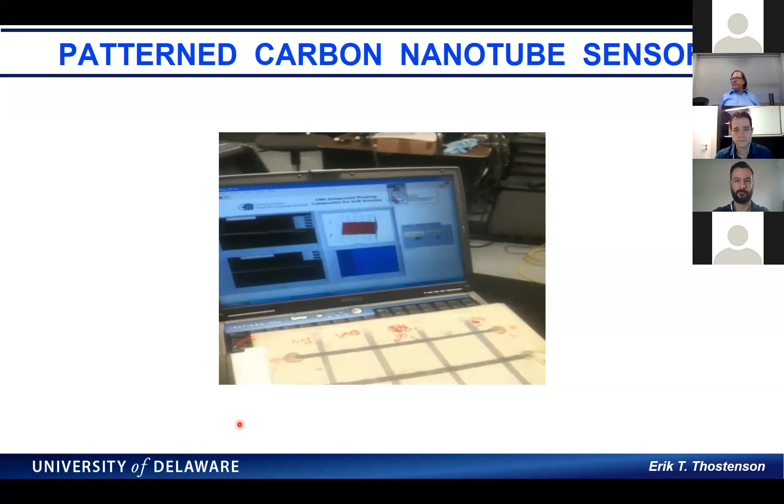So it's just like in this video here. This was actually a demo panel we made for an engineer's day at an aerospace company. We have Engineers Week here in the US, so we made this for our show and tell, so people could pull it around and bend it. It certainly does detect damage, and of course it's more sensitive to delamination than to microcracking, but it is sensitive to microcracking.